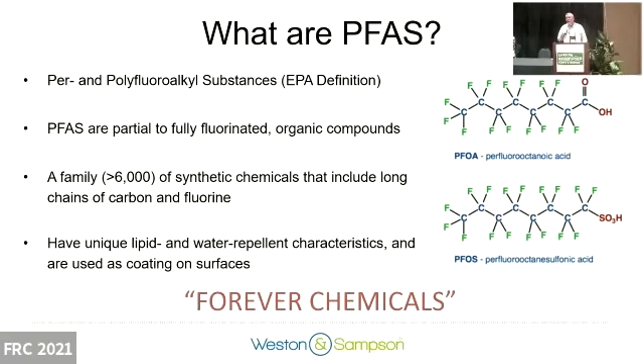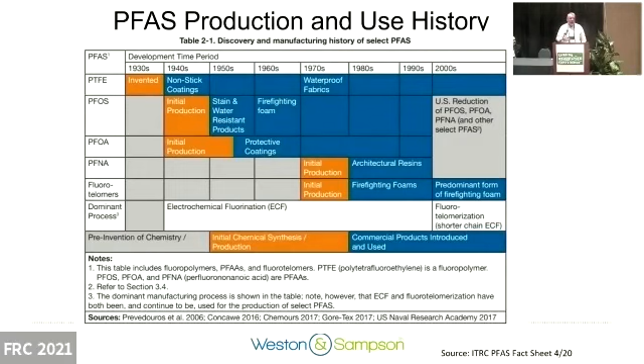A little bit about Weston and Sampson. Some folks may know us, our office in Florida is in Fort Myers. We're actually a 122-year-old infrastructure firm, environmental infrastructure. But why PFAS is important to us is we do a lot of work in the water supply side, wastewater industry in particular, and obviously environmental impacts. The nexus of those three disciplines is really where PFAS sits. We're headquartered in New England, but with offices up and down the East Coast. My background, I'm a hydrogeologist, studied geology at Imperial College London and did my master's at the Hydrogeologist program at the University of Nevada. So I come at this very much from a fate and transport perspective, but I've fortunately worked with a lot of colleagues that have other perspectives too, which has led to us forming an emerging contaminants work group at Weston and Sampson, where all the disciplines come together to evaluate this issue.

So I know most folks know this. What are PFAS? Just going to hit it very quick. As you know, fully or partially fluorinated organic compounds.

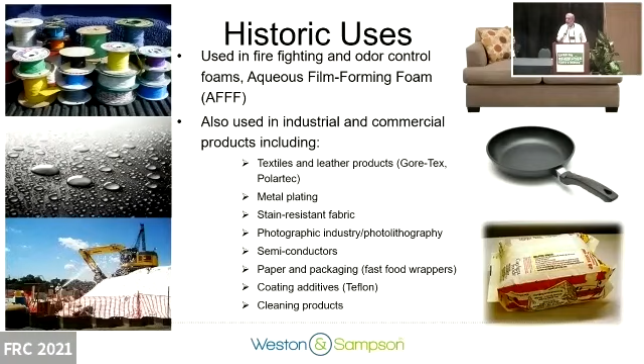PFAS is a family of compounds. We've seen anywhere from 3,000 to 10,000 compounds listed under the family of PFAS. The two ones that most people are most familiar with are PFOA and PFOS.

As most folks know, they're everywhere. What makes them useful is their unique lipid and water repellent characteristics. So they've been used as coatings and surfaces, and they've also been dubbed forever chemicals because they don't break down.

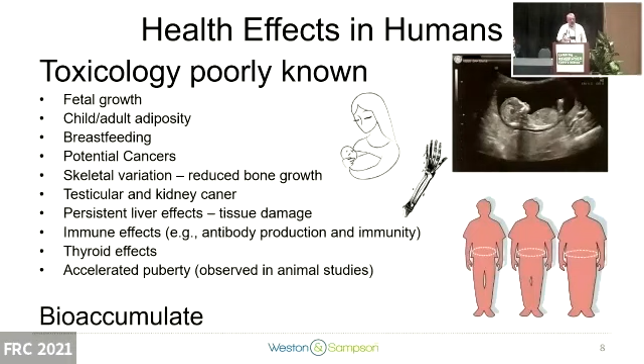Briefly on the history, as most folks know, Teflon was really developed in the 30s and 40s as non-stick coatings. It's been around for a long, long time.

But PFOS and PFOA started really in the 50s and 60s, with production ramping up through the 70s until really the 2000s, where production was ceased, replaced by replacement compounds that we'll talk about in a minute.

PFOS occurs in stain-resistant products and firefighting foam, and that's one of the big sources that folks know about. PFOA tends to be more in protective coatings.

So as I mentioned, historic uses: PFAS compounds are in everything from food packaging to stain-resistant carpets to simonizing your car to aqueous film-forming foam, the firefighting foams that we find. So that's why they're ubiquitous. That's why we're finding them everywhere.

When we talk about health effects in humans, toxicology is poorly known, really. There's a lot of studies that have happened in the last few years, but the data is inconsistent, I would say. But there is evidence clearly about fetal growth, potential cancers, persistent liver effects, child and adult adiposity.

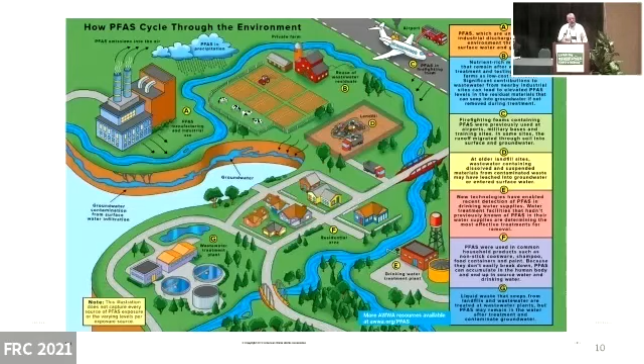We're going to talk about water supplies because the main source of PFAS exposure is through ingestion. Point sources, wastewater treatment facilities, biosolids is a big issue.

It's interesting, I think one of the takeaways today is you'll see how quickly regulations have been changing over the last few years. Just yesterday, I saw a letter from New England Water Environment Association to the Massachusetts DEP, particularly pleading the case. It was very strongly worded, actually, for wastewater treatment plants and the challenges they face right now.

Because they end up being a collection point for a lot of water from around a large sewer shed and become a point source discharge. So this is a real problem for them. Landfills, fire training academies, which we're going to hear about, which will be great, and various products.

This is an American Waterworks Association slide. It's very busy. I like it because it just captures kind of the PFAS cycle in the environment.

Multiple point sources ending up in soil and groundwater, be it from runoff, be it from land application of biosolids, be it from aerial discharge. Water treatment plants take the water out, it gets concentrated back at the wastewater treatment plants, back into the cycle.

And the cycle repeats. So this is why when you may have a point source of PFAS at one area, because of how it's collected and moves, it can end up getting spread around in different areas.

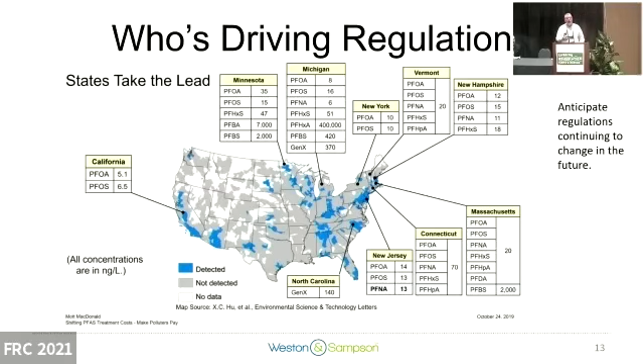Other states are taking the approach of, well, let's understand what our issue is. So in South Carolina, for example, they're looking at their water supplies first. They have a lot of surface water supplies, so they're looking at intakes, and they're coming at it from the approach of, well, we're going to hold to the EPA health advisory, but we're trying to get our arms around how big a problem we have. A number of states have taken that approach.

The key, of course, is once you've got information, managing that information and risk communication. In the plenary yesterday we were talking about that, and obviously we're in a post-Flint, Michigan world, so it's so important how, as agencies collect the data, they present it. I know we've got some folks from Florida DOH here, and I'm interested in hearing from them about how their program is going and how that information is stored and communicated.

So who's driving the regulations? As I mentioned, the states have been for the last 3, 4, 5, 6 years. In Minnesota, Michigan are out in front of this, California, as you might expect. In the Northeast, it was the state of Vermont that really stepped up.

Vermont and New Hampshire, those two states have a lot of private bedrock wells, so the whole state's considered a drinking water resource. So they came at it and looked at the 70 parts per trillion and said, no, that's not good enough. We want to evaluate our most sensitive population, i.e. babies, and they dropped their limit to 20.

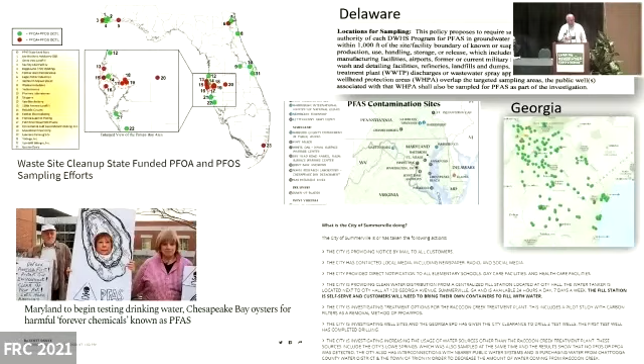New Hampshire, for example, required that every active landfill monitoring program and waste assessment program test for PFAS. That was a requirement, and they uploaded all that information to a database.

Other states are kind of doing something similar. Massachusetts is starting to require that. But the problem there is then you become, if you've got it in your own well, a PRP. So people are refusing to test. And this is getting very, very thorny right now because it can lead to enforcement, as we've talked about.

So, mentioned the states leading the charge. In some instances, like the picture here of a grassroots group in Maryland, some of these projects, some of the impetus, I should say, happened really from grassroots involvement.

My company's working on a different site in Portsmouth, New Hampshire, working for the city where they've got municipal wells. They were shut down because they're adjacent to Pease Air Force Base. PFAS was found in the water system. This was before New Hampshire DES had any regulations in place, but the public outrage and pressure resulted in an immediate shutdown of those wells.

And so really the assessment and evaluation of that system and the source area, of course that the Air Force was already looking at, went way out in front of where the regulations were at that time.

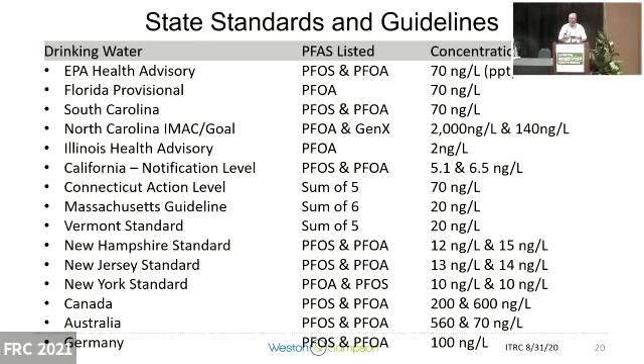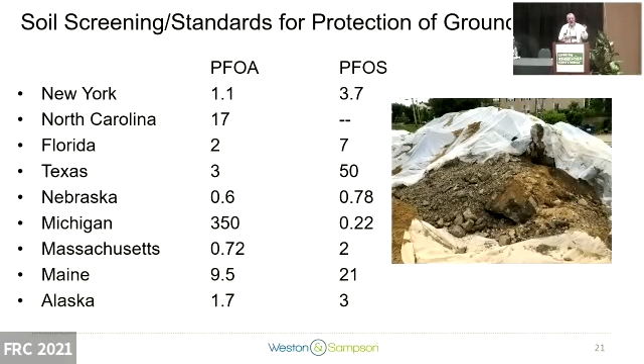I have a different example up in the Northeast where one of the agencies, the Department of Health, had collected data, stored that data, but hadn't communicated to the Department of Environmental Protection who was responsible then for responding to PFAS. And so it created a little bit of stress between those agencies. So I think the dynamic plan, again, I'd love to hear from the Florida folks here, is designed to iron out some of those challenges.

So this is a snapshot, and it's interesting just to see where we're at across the country. 70 nanograms per liter, parts per trillion, EPA health advisory. Many states are following that. But where are other states? I mentioned Vermont, 20 nanograms per liter for 5 compounds.

Massachusetts has gone for 6. New Hampshire has standards for PFOS and PFOA of 12 and 15. New York, 10 and 10. So the states are all over the place, and it sometimes feels like a race to the bottom. And as we all know as environmental professionals, the lower we go, the harder it is to test and have reliable tests.

Interestingly, Canada, Australia, and Germany have a completely different set of numbers that they're working from. Canada, 200 and 600, is that right? I don't know. It really shines a light on where the toxicological studies are at and the assumptions that went into those.

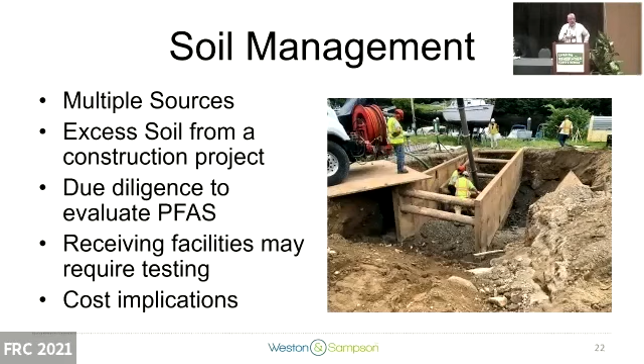Soil screening standards are coming in. Florida has some standards and will be enacting them. This really shines a light on one of the challenges we're facing right now, particularly in soil management. I was listening yesterday in the plenary, talking about management of contaminated soil. It's something I do a lot of in my day-to-day job, particularly working in the Northeast where there's a lot of old legacy sites and a lot of construction. It really shines a light on the need to do your due diligence.

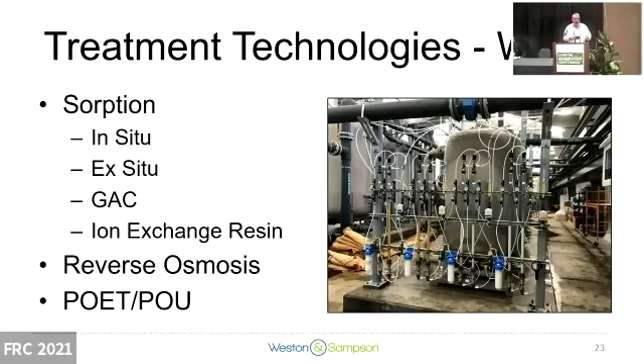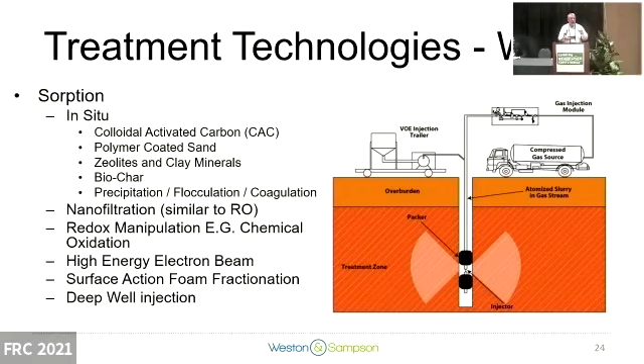What we're seeing now is receiving facilities either requiring testing of soil, and as most of you know, the soil methodologies for PFAS are kind of all over the place, but they're either requiring testing or requiring certification from the environmental professional that there's no PFAS there, which of course now has cost implications, schedule implications, etc.

We worked on a project in New Hampshire. We only had like a 50 to 80 cubic yard pile of soil, but we knew there was PFAS in it from the site history, and no one would take it. We actually had to go to Canada. So as you can imagine, there's paperwork, schedule implications, cost implications. Fortunately, we were able to move that soil just before lockdown and the Canadian border shutting. But Canada can't be the solution. So soil management is going to be a real big issue moving forward.

So we'll talk a little bit about water treatment. My company comes at it from the perspective of water supply, where we've been looking primarily at granular activated carbon, GAC units, but we've put in about seven or so emergency systems now for large scale municipal water supply wells. We've got GAC units, we've got resin units, we've done pilots where we've looked at combinations of both, and they work very well. Reverse osmosis works really well, and we've also worked on a lot of point of entry and point of use systems.

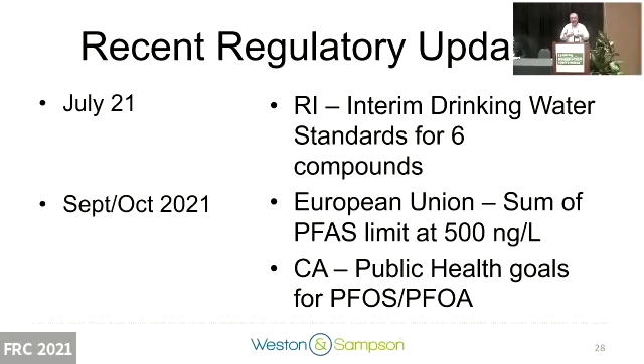I thought it was interesting—a lot of us have been working in the environmental field for a long time, and I can't remember any compound or family of compounds that got as much attention as PFAS so quickly. I just threw out a bunch of milestones that have happened really since the COVID outbreak. It seems like yesterday, but it also seems like a long time ago.

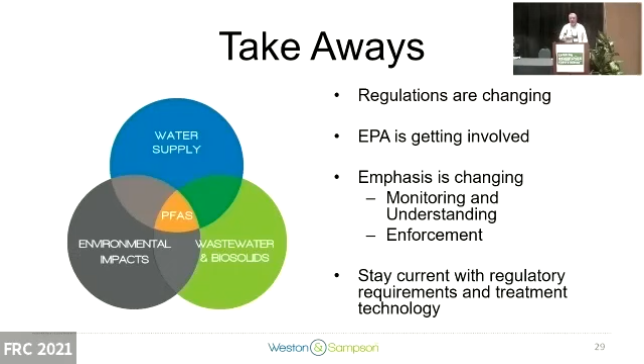But from March 2020 to now, what's been happening around the country? Vermont came out with their Sum of 5. New Jersey came out with their standards. Colorado came out with numeric values. New Hampshire formalized their standards. Michigan came out with drinking water standards. New York came out with drinking water standards. Massachusetts formalized theirs and came out with the Sum of 6. Illinois came out with the PFOA Health Advisory. Texas now has standards for 16 PFAS compounds, as does Hawaii, with their action levels. Illinois came out with new guidance for PFBS—not so many states have guidance yet for that compound, and EPA is looking at it. Rhode Island came out with standards for 6.

Interestingly, just last month the European Union came out with a PFAS limit of 500—much more lax than what we have here in the States, but interestingly it's a sum of PFAS, and I don't know how many compounds they count to get to that 500. And of course California came out with some recent goals. Then we have new information from the feds that they're starting to take this seriously and are going to evaluate the toxicology studies of PFOA and PFOS. All this has happened in 18 months, so it's amazing the pace of change. Takeaway: regulations are changing.

You know, what happens in other parts of the country we need to pay attention to, particularly if you play in the water supply world, where you may be finding concentrations in groundwater around 30 to 40, which we see in Massachusetts all the time, or low teens, because you might be below the limit today, but if the limit changes or the state decides to go to a sum, then suddenly these sites are going to require cleanup.

EPA is getting involved, as we mentioned, and the emphasis is changing. It's been monitoring and understanding, but it's leading to enforcement. I'm certainly seeing that in the state of Massachusetts and starting to see it in some of the other states, in New Hampshire particularly.

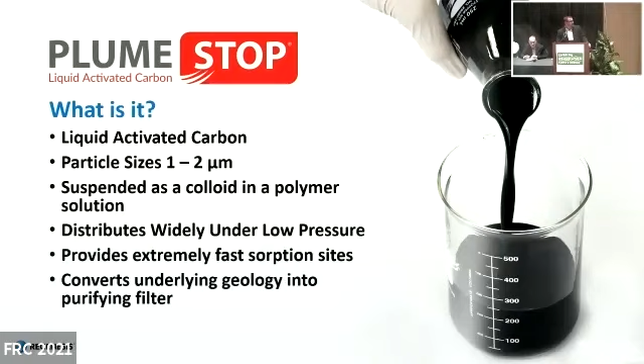So really, the question is, forever chemicals -- do we have a forever solution? All right, so keep that in mind. Let's see what we got.

So I would be remiss if I did not actually introduce the real brains behind the operation. I'm just the mouthpiece for all these folks that are part of our PFAS team. Both doctors Paul Erickson and Kristen Thoreson out in California have been essential and vital to the development of our technologies, both Plume Stop that we'll talk about today, as well as some of our flux mapping tools.

Jeremy Birnstingl, hailing from Bath, England, is the man behind the curtain for Plume Force, which is a software that I'm going to talk about a little bit today that we use to model Plume Stop longevity.

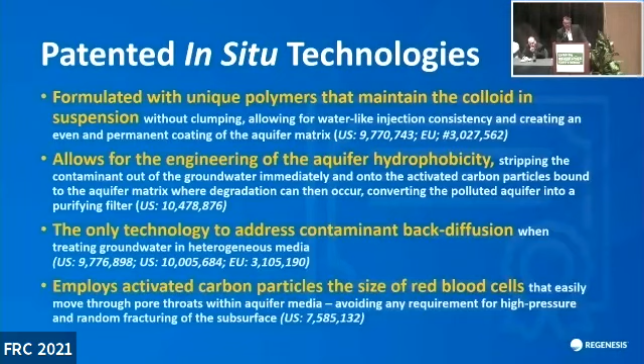And Dr. Liu has been supporting this entire PFAS team. I know a lot of you have heard me talk about PlumeStop or others in the past, but typically we're co-applying it with other reagents to degrade and have a destructive technology for the contaminants. In the case of PFAS, that's a little bit different, so you may not know what we've been doing with it in the PFAS world. I want to dig into that a little bit today.

In case you aren't familiar with PlumeStop, there are two key things. One is the size of the carbon - this is 1 to 2 micron scale carbon, basically the size of a red blood cell, relative to GAC, granular activated carbon, which is more on the scale of 500 to 1,000 microns. The second thing is that this has an organic polymer that allows for a unique dispersion within the subsurface. So we can do high volume, low pressure, wide area distribution with this technology, which is vital for forming essentially a carbon filter, a purifying filter, in the subsurface.

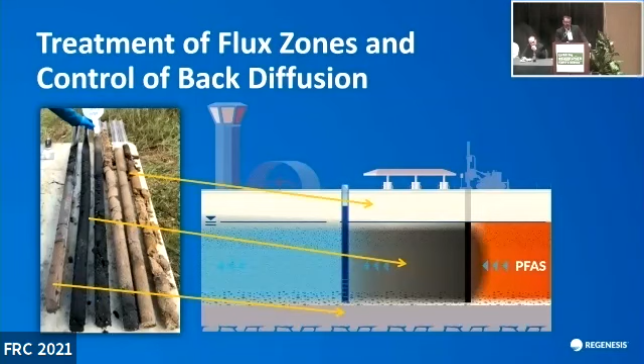I think one of the ways to really understand the technology is to get under the hood a little bit and take a look at the patents associated with it. I know that sounds boring sometimes, but it was kind of enlightening to me when I started thinking about what is it we said we can do with this stuff.

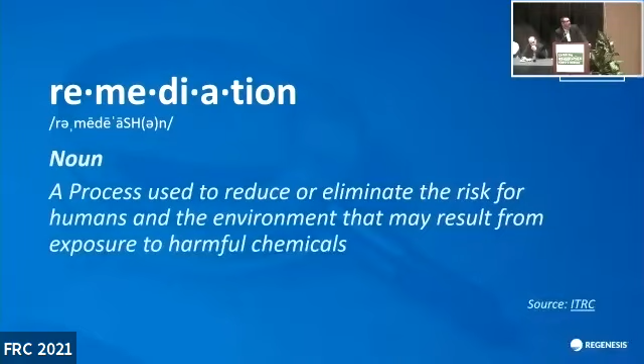One, like I said, there's a unique polymer, a dispersion chemistry that's vital for distribution. The second is the ability to engineer the aquifer hydrophobicity - another way of saying that is engineering the retardation in the subsurface. That's a unique quality for an in situ reagent that I'm going to dig into a little bit more with the modeling and what we do with that fact. So keep that in mind - aquifer hydrophobicity. Say that really fast several times.

And we're also able to deal with back diffusion because of the longevity and permanency of this reagent in the subsurface - I'll visually share that with you in a bit. And of course, again, this small size of the carbon is vital to getting it to where it needs to be.

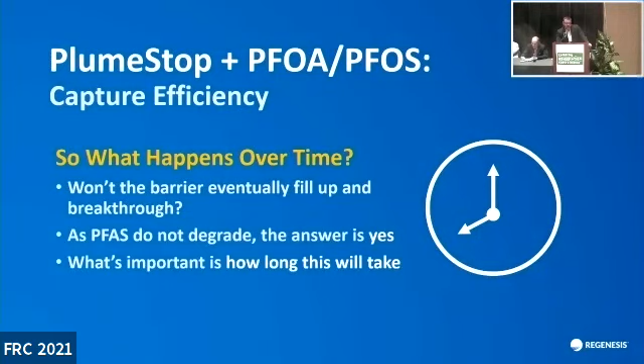Generally in most of our designs, what we're really trying to do is target what we call the flux transport zone. This is the area of the plume whose architecture and behavior is shaped by where the contaminant mass is moving through the aquifer matrix, through these very high permeability zones in most cases. Once we have it in place there, we can deal with back diffusion from lower permeability units. The carbon remains in place and keeps working for us after there's been a change in that aquifer concentration gradient. Even if we have stuff infiltrating from the vadose zone above, for example, we can still manage that in this high flux transport zone. So that's kind of our target.

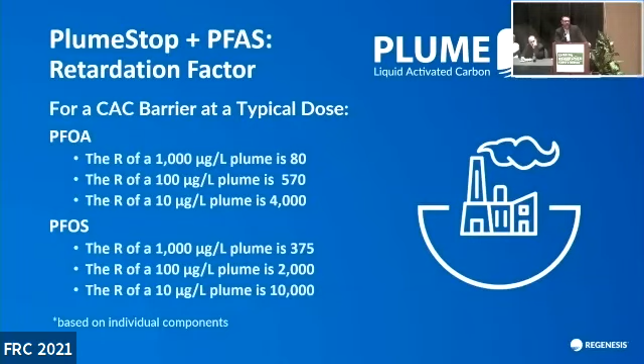It's kind of funny being at the Florida Remediation Conference, and I'm going to tell you what remediation means. According to ITRC, let's back up and think about what remediation is: a process used to reduce or eliminate the risk for humans and the environment that may result from exposure to harmful chemicals - eliminate the risk to exposure. With that being the case, we know that in our world, risk equals the product of hazard times exposure. So if we can bind up the PFAS in situ - again, this is not degradation or destruction, but a binding up, an adsorption of this - then we can eliminate any potential down gradient exposure. By eliminating exposure, we eliminate risk, very simply. We do this all the time, really, with risk-based corrective action, no further actions, where we leave contaminant mass in place. So this isn't really a new concept, but this is what's behind it.

That being said, I'm sure some folks are thinking, well, it's a carbon filter in the subsurface, it's going to fill up, there's going to be breakthrough at some point. And that is very true, because we're not destroying or degrading mass in this case. However, probably the more important questions are: how long is that going to take? Can we model that?

And what could we do about it if we do have breakthrough? So let's take a look at some of those questions.

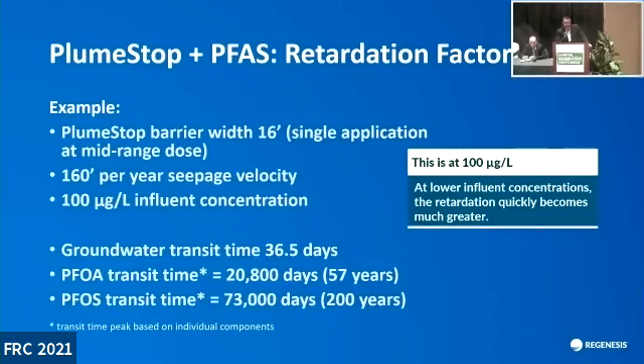First of all, I mentioned earlier about modeling the aquifer hydrophobicity, that we have the ability to engineer the retardation factor. As a reminder, a retardation factor value of 1 means the contaminant molecule and a water molecule are basically moving at the same velocity in the groundwater. As we increase the retardation factor, think of it as slowing down that contaminant molecule through the aquifer.

You can see for different plume concentrations, let's go down to the 10 ppb. Keep in mind 10 micrograms per liter is 10,000 parts per trillion, which falls in the realm of a lot of our PFAS plumes. For PFOA and PFOS, we can increase the retardation factor to values of 4,000 to 10,000. That's orders of magnitude difference in the movement of that contaminant molecule. That's very significant.

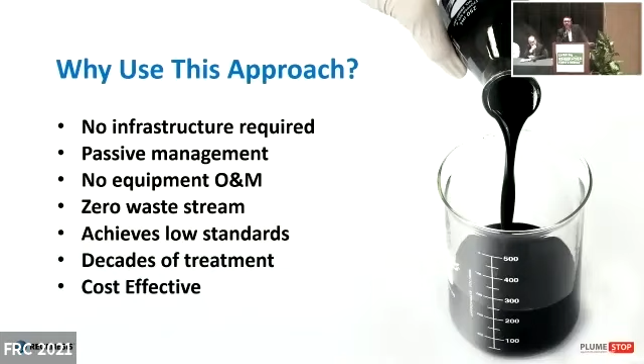So what can we do with that information? Here's a practical example. Think of a 16-foot wide plume stop barrier in the subsurface. We've got about 160 feet per year as a seepage velocity, a decent clip. And we're looking at a plume that's 100 ppb, about 100,000 parts per trillion. So for the groundwater transit time to move through that zone, it'd be about a month, about 36 days.

If we look at the equivalent for PFOA, we're talking about 60 years, six decades for that contaminant molecule to work its way through that same zone. If we look at PFOS, which is even more adsorbed, we're talking about two centuries, 200 years. You can see the difference in the ability to engineer has some implications.

So why take this approach? We call this passive plume management. A lot of folks think of it as putting in a permeable reactive barrier of sorts, and that's true too.

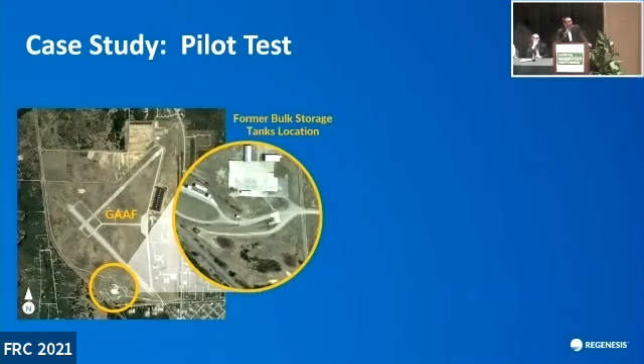So you don't have any infrastructure, which means no O&M. That also means, as George was saying earlier, we're not generating any media above ground that might have to be dealt with as a hazardous substance. That's coming down the pipe, and we need to be preemptively thinking about that. So no waste stream is being generated through this.

And we know carbon in all its forms, colloidal, micron scale, GAC, all of it can manage to treat down to the part per trillion range. A lot of things can't achieve that. And I'm going to show you in the modeling that we can achieve decades of treatment by putting a single application in the ground. So that obviously sounds pretty cost effective.

So here's a story from Michigan. I hail from Michigan, don't hold that against me. Former Michigander turned Floridian. But this is an example.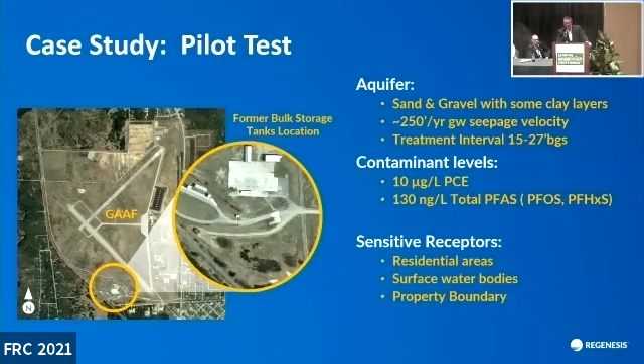It's not the longest running site that we have. This is about 3 years now going on below cleanup levels. We have others that are a little bit longer. We've all been in this game not too long as it is. So 3 years isn't too bad in this story.

This is the Grayling Army Airfield near where I used to live up in northern Michigan. It's actually got some interesting history. It's the largest National Guard training facility in the country, which I didn't know when I lived up there. It's over a century old, around since the early 1900s, almost 150,000 acres. Our focus area is only about 1,000 acres of that at the Grayling Army Airfield.

So there's been a long history here: diesel releases, later chlorinated solvents were identified, and now PFAS, as we're going to find at a lot of sites. And it has kind of a traditional remediation history, pump and treat, SVE, air sparge.

So kind of honing in on the subject area there, you can see the airfield, and then we're down towards what was the former bulk storage tanks location.

If we look at the geology, as expected, a sand and gravel, some clay lenses, moving along pretty good, 250 feet or so per year for the seepage velocity. We're going to target an interval between 15 and 27 feet. We're going to actually divide that up into 2 intervals that you'll see later with our monitoring wells, nested monitoring wells.

Pretty low levels of chlorinated solvents, but this is a commingled plume. Again, a very common scenario. Most cases we're seeing that these are commingled hydrocarbon or chlorinated solvent plumes with PFAS. The total PFAS is around 130 ppt, with PFOS being kind of the driver.

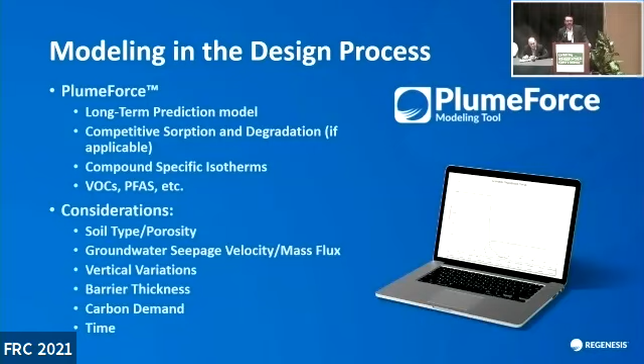And there's a bunch of sensitive receptors down gradient, just down gradient is a residential area, the Au Sable River, where I used to fish and camp. So it's starting to hit home for all of us as we're finding out how ubiquitous this stuff is. The very place I used to hang out and fish with my family is near the subject site that we're talking about today.

So I mentioned earlier modeling software. Plume Force is something that was developed internally for us. This is essentially a long-term predictive model, so a fate and transport model. It takes a lot of stuff into consideration, again, when you go under the hood.

So we're looking at competitive adsorption. When it's applicable, we're looking at degradation and destruction. So if we do have a commingled plume, we can degrade and destroy those contaminants via other biotic or abiotic means. So that's taken into consideration as well.

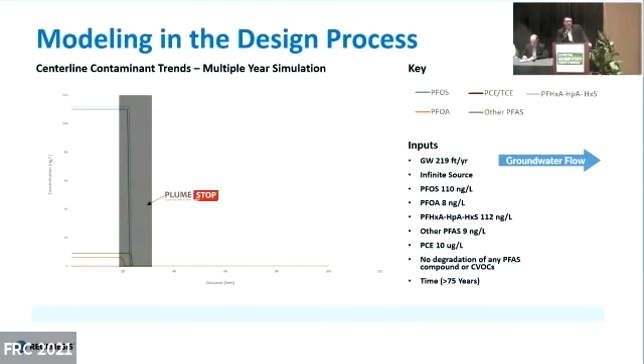And we're also looking at compound-specific isotherms. So how well do certain compounds adsorb to the carbon? And that varies for each compound. It actually varies with the type of carbon. Granular activated carbon has a different isotherm than colloidal activated carbon, which you may not know, but the smaller particle size allows for more efficiency with the colloidal carbon.

And then we can do this for all the different classes of compounds, whether they're chlorinated, PFAS, hydrocarbons, et cetera. So then there's a bunch of parameters that we can dump into this. Some of them are fixed based on the geology, whether that's the porosity, for example, based on the soil type, and we can look at hydraulic conductivities.

But then we can start manipulating some of these things. Well, how thick of a barrier? How much of a dose? Things of that nature. And doing that, we can either predict the longevity, or we can use a certain dose to see what kind of longevity that we want to target. So we can start messing around with some of these parameters.

So here's kind of a typical example of an output from that software. You can see the different contaminant types up there in the key. I'll point out for the inputs on this, we're assuming an infinite source, and we're also assuming no degradation, which neither is really the case. So it's a very conservative estimate.

So looking at groundwater flowing from left to right on here, you can see putting in the 10-foot barrier. We can look at each one of these compounds and predict how long they're going to stay within that barrier. Again, that adsorption isn't a permanent process, but we're changing the retardation factor. We're altering the FOC.

So we can look at how long it's going to take for breakthrough to occur here. So we look at both the chlorinateds, we're looking at the different PFAS compounds. In this model, we would assume that it would take over 75 years for that to occur. So again, that's a conservative estimate. These are fairly low level concentrations, but that's a really long time.

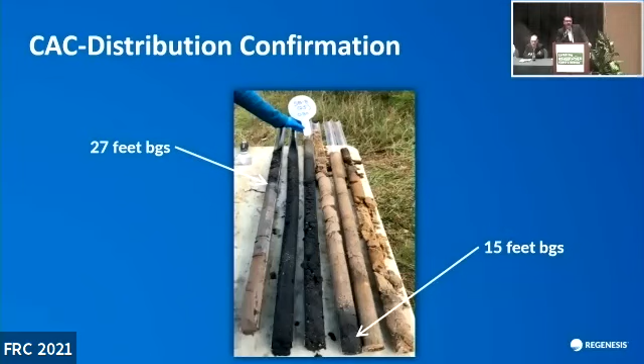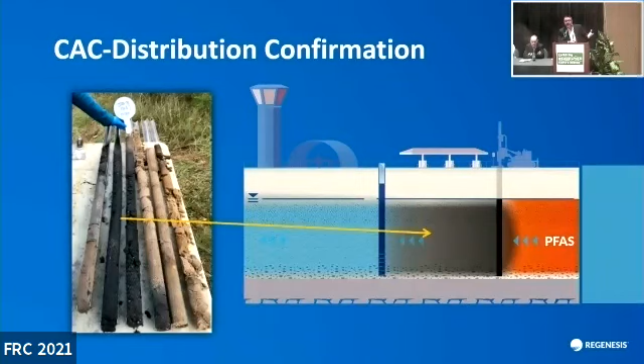Another thing that's really cool about using carbon in the subsurface is we can use it as a tracer. We can look at placement validation, as we like to call it. We can do these searcher cores and go out and take cores as we start remediation in the field, and we can make adjustments. So we might assume we can go a little further than the ROI and step out at the edge of the barrier to see if we get influence. If we don't, we move back into our ROI and make those adjustments real time in something I'd call dynamic remediation, making changes in the field to optimize based on the baseline being our design.

So you can see here, we started out a little bit further than we anticipated from the ROI. We didn't see it, so we moved back in and started getting these searcher cores showing evidence of the carbon distribution. We did that across the barrier in different locations.

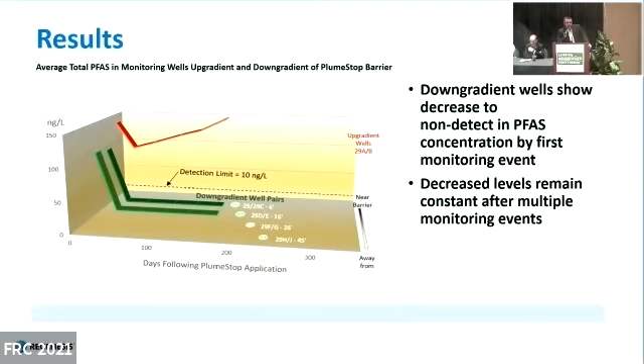Here's a great visual where it becomes very evident. We've got carbon distribution. If you look to the right, that's the top of the surface, going down to that lower permeability clay at 30 feet. Then about at the beginning of the water table at 15 feet BGS, down to 27 feet, we got good solid distribution of that reagent across the entire target zone.

Remember I said earlier that target zone represents what we're calling the flux transport zone. That's really where we want to get the bulk of the reagent mass, and that later will also help deal with any back diffusion from that low permeability clay and anything that might be coming in from above.

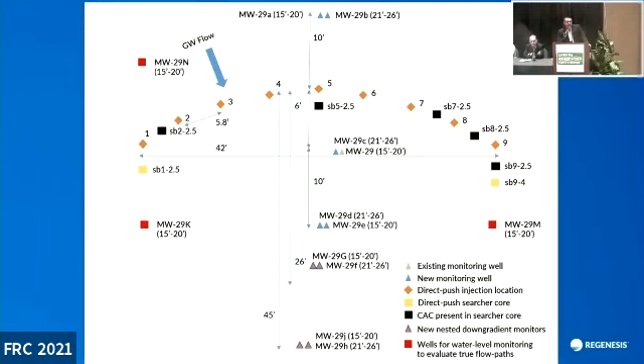Sometimes it's not that obvious, depending on the soil type and color and things of that nature, and the concentrations. So there are other things we can do. Sometimes we'll do what we call shaker vials for placement validation — essentially adding a little water to some of the soil samples, and we can start to see that plume stop come out. And of course, at the monitoring well, we want to see influence — it's very evident. We want to make sure we're achieving that ROI, and we can use colorimetric test kits to confirm the concentrations against the design as well.

And that will eventually deposit and become a permanent part of the aquifer matrix. It binds to the soils, and that is permanent. So you won't see it lasting in the wells forever — usually within a quarter it'll be gone. It's a great indicator up front.

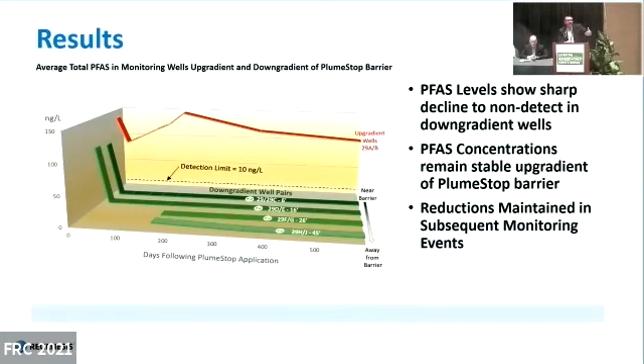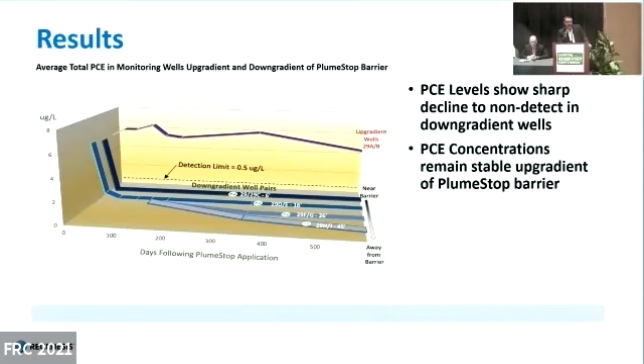So here's a couple of charts I'm going to walk you through. This represents total PFAS. The red line above is the influent concentration — it's steady and trending downward a little bit over the course of this period. The two lines below represent those sequential nested well pairs, the first and second, and you can see an immediate drop to non-detect of the PFAS compound concentrations right off the bat. Those concentrations are sustained through this particular duration of about 500 days.

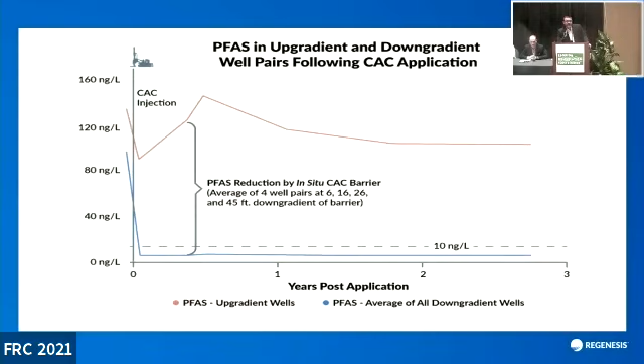So that's the PFAS story. And if we look at the chlorinated solvents, the PCE in this case, same story — we got a steady influent concentration, that top line.

We see an initial drop right off the bat from those closest wells, and then a little bit more pronounced lag going from the down gradient wells that eventually tail off to non-detect. So all of this has been sustained now for about 3 years.

To put it in a simpler perspective, you can see the average coming in for the PFAS in the red line, and down below you see after injection the average across all of those wells below 10 ppt, the detection level.

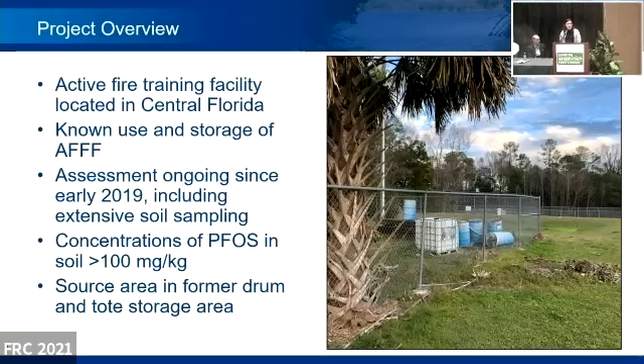Oh, look at that. Hey, everybody. As Joe mentioned previously, today I'm going to be talking about an ISR that we recently completed at a site here in Florida. We believe that this is one of the first interim source removals for PFAS at a fire training facility in the state, and we encountered some very unique challenges that I'm going to share with you today. I'd like to thank the FDEP for the opportunity to work on this project with them and to be able to present it to you all today.

During this presentation, I'm going to provide an overview of our project and a little site history. I'm going to review the objectives of our ISR, discuss the project's timeline and some considerations we made during the planning process, share some lessons learned during the project, and highlight some key takeaways.

Our site is an active fire training facility located in Central Florida. The facility has stored and used AFFF historically for training exercises, and they've used a variety of different AFFF products, including protein-based foams. Geosyntec has conducted assessment activities since the beginning of 2019, which has included both soil and groundwater assessment, but I'm going to focus on the soil today because we're talking about the interim source removal.

That's included the collection of over 800 soil samples at 150 boring locations to evaluate the extent and magnitude of PFAS across the site. One source area we identified is their former drum and tote storage area, which you can see pictured on this screen. We have identified concentrations in soil of PFAS, PFOS specifically, at concentrations greater than 100 milligrams per kilogram, and some samples greater than 200 milligrams per kilogram.

We have had a few exceedances of PFOA, but they've mostly been leachability-based criteria exceedances and not direct exposure exceedances. So our driver at the site really is PFOS specifically, and that's not that surprising considering that the source is AFFF related.

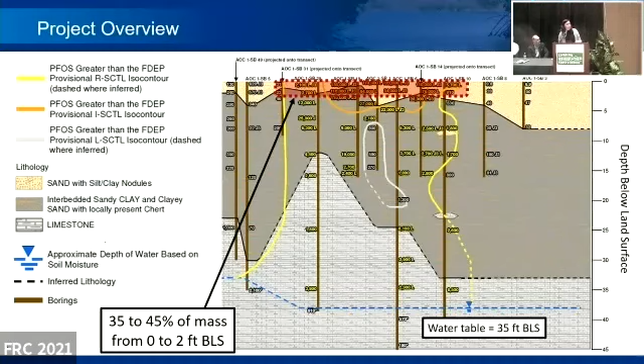As mentioned on the previous slide, our site-wide soil assessment has included the collection of 800 samples, but this specific area where they used to store the drums and totes, we've collected close to 450 samples at 64 boring locations, which is quite extensive given the size of the site, but that was really to refine our understanding with the end goal being remediation. So we really wanted to understand exactly how much was there and at what extent.

This slide includes a cross-section of this former drum and tote area. If you can see the colors, the yellow contour is the concentrations in soil that are above the residential direct exposure SCTL for PFOS. The orange contour is the concentrations in soil that are greater than the industrial SCTL. And the gray contour is the concentrations that are greater than the provisional leachability-based criteria.

As you can see, the geology at this site consists of surficial sands interbedded with clayey sand and sandy clay, followed by limestone. The limestone varies greatly with topography across the site, and you encounter it at all sorts of different depths. You never know what you're going to get when you're hand augering. The depth to water ranges between 35 and 45 feet.

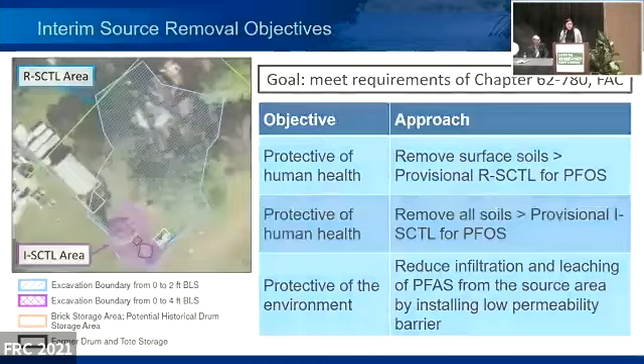As I mentioned previously, our primary contaminant of concern at the site is PFOS. During our assessment activities in and around the former drum and tote area, we identified concentrations greater than the provisional residential SCTL from land surface all the way to the water table, which, as I mentioned, is 35 feet at a minimum.

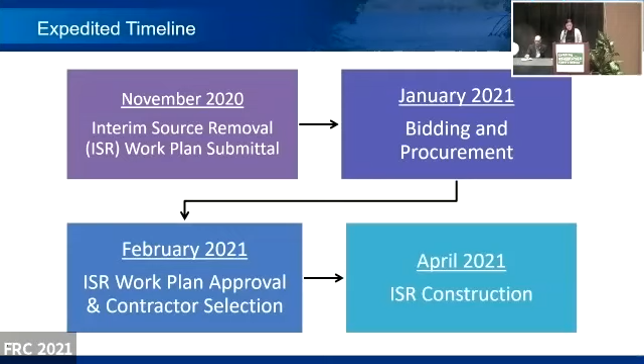Our concentrations of PFOS above the industrial SCTL extended from land surface to 4 feet, but approximately 35 to 45% of the total mass from land surface to the water table was within the top 2 feet alone, which is noted in the red square on the screen.

The image on the left of this slide illustrates the horizontal extent of our excavation areas. The blue shading indicates the excavation proposed based on residential SCTL exceedances, and the purple represents our proposed excavation based on industrial SCTL exceedances. It might be hard to see, but if you notice the little black squiggly lines, that's actually the footprint of where the drums and totes were formerly stored in this area.

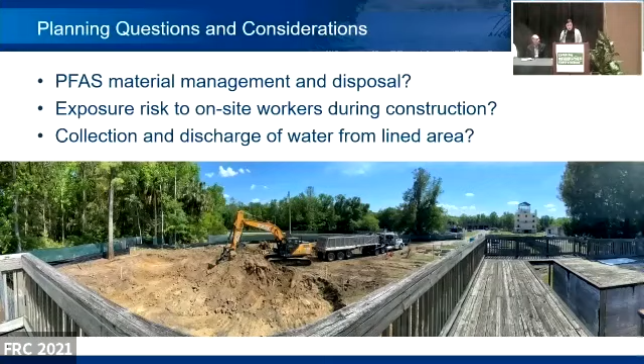The goal of our ISR was to meet the requirements outlined in 62-780 for an interim source removal and for engineering controls, and we wanted to be protective of human health and the environment. So our approach was to eliminate the direct exposure concerns by removing soil within the top 2 feet that was greater than the residential SCTL, and then removing all soils that were greater than the industrial SCTL for PFAS, which, as I mentioned, happened to be from 0 to 4 feet.

To help reduce infiltration and leaching from impacted soils left in place, we installed a low permeability barrier at the bottom of our excavation prior to backfilling.

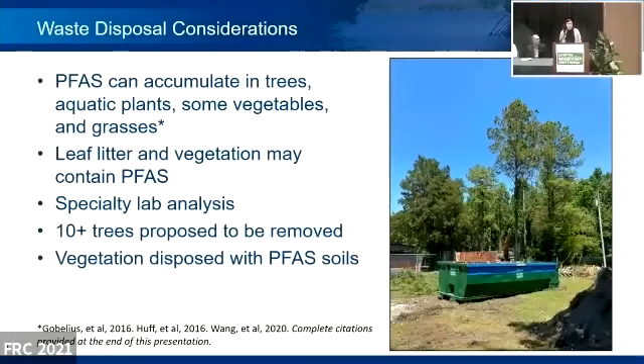The timeline for this project was pretty quick, and that was driven by the testing schedule at the facility. We submitted our ISR work plan in November of last year, and we began construction in April of this year. This brought about some planning challenges, but we were able to successfully implement our ISR in time.

As many of you probably can assume, there are many logistical challenges for planning a PFAS source removal, not just the expedited timeline for this project in particular, but just the nature of the contaminant itself. Some of these challenges include how the excavated materials should be handled and disposed. At our site in particular, we were managing soil, green waste, including vegetation and trees, and concrete. And what disposal facilities will accept your PFAS soils when you have concentrations that are in the hundreds of milligrams per kilogram?

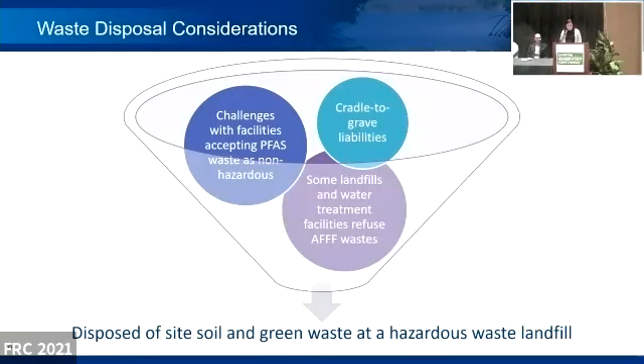When you're excavating, is there a risk of exposure to the on-site workers during construction? And when you install the liner to help reduce infiltration, how will the water be collected and discharged? The remainder of my presentation, I'm going to review some of these challenges, starting with the disposal consideration.

Literature suggests that PFAS can accumulate in trees, some aquatic plants, vegetables and grasses. So there's the potential that the leaf litter and vegetation at our site may have been impacted with PFAS as well. The sampling procedures and lab analysis can be costly because this is pretty fancy sampling.

Within our work area in particular, we were proposing to remove over 10 trees to achieve the horizontal extents, which would have required us to collect quite a few samples to evaluate whether or not the trees had PFAS in the first place. So given our expedited timeline, and to be conservative, we opted to just dispose of the trees and all the vegetation along with our PFAS impacted soils.

Some other challenges with disposing of PFAS waste, specifically waste that has AFFF, is that not all facilities will let you dispose of it as non-hazardous, and some facilities just won't accept it at all. Additionally, if it's disposed of as non-hazardous, that means there are potential cradle to grave liabilities for our clients. To be most conservative and help reduce potential future liability, all of our soil and green waste was disposed of at a hazardous waste landfill.

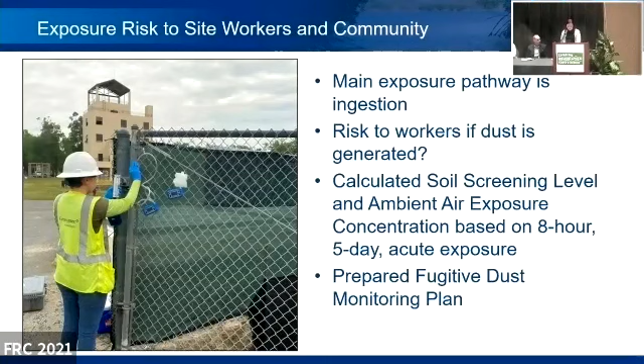The facility we selected had a closed loop leachate collection system. I should note that not all disposal facilities have a closed loop collection system, and some send their leachate to a treatment facility or dispose of it with other methods. This is something you should consider when selecting a disposal facility for your projects.

The next planning consideration we worked through was potential exposure to on-site workers and the surrounding community during construction. The main exposure pathway for PFAS is ingestion, and these compounds are not readily volatile, but there's the potential that PFAS sorbed to your soils may be ingested by on-site workers if dust is generated during construction.

As part of our ISR work plan, we developed a soil screening level and an ambient air exposure concentration based on acute exposure scenarios. The soil screening level represented a health-based screening criterion for soil, predicted based on worker inhalation exposure during construction with the potential that dust would be generated.

In theory, if you have soil concentrations substantially below this value, then you're unlikely to require ambient air monitoring. Our highest concentrations in soil at the site were well below our calculated value, but to be conservative and to confirm this risk, we opted to implement an air monitoring plan during construction.

The ambient air exposure concentration was based on our highest soil concentrations at the site, and we correlated it to a total dust concentration, which was used by our field staff. We developed real-time alert and action levels so our field staff could measure real-time time-weighted averages in the field to evaluate potential exposure.

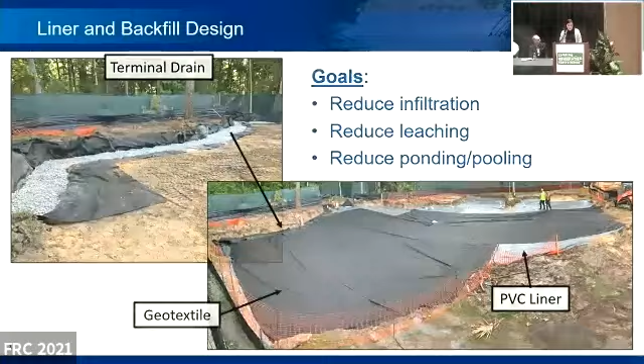Our upwind and downwind stations were placed on the fence line of the work area, and we determined their placement each day based on wind direction. If the wind direction changed, we'd move our air monitors accordingly.

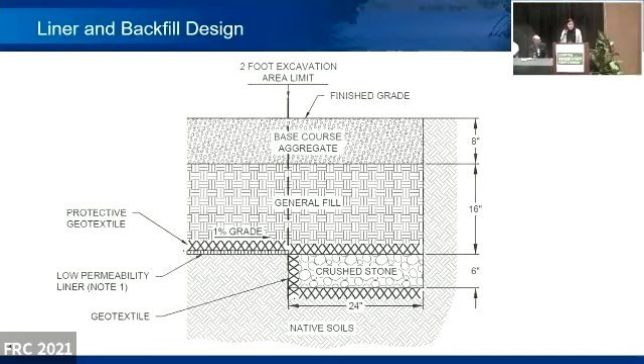We also collected lab samples every day for analysis of PFAS and total dust, collected at our downwind monitoring location. The photo shown on the left of this slide shows the sampling media provided by the lab, which consists of a low volume PUF tube.

The results from our real-time dust monitoring at all three stations were below our established alert levels, indicating that we did not generate dust that posed a risk to our workers on site. Our laboratory samples did not have detections of PFAS or total dust, indicating that our construction activities did not pose a risk to the surrounding community or to the facility personnel working and training at the site.

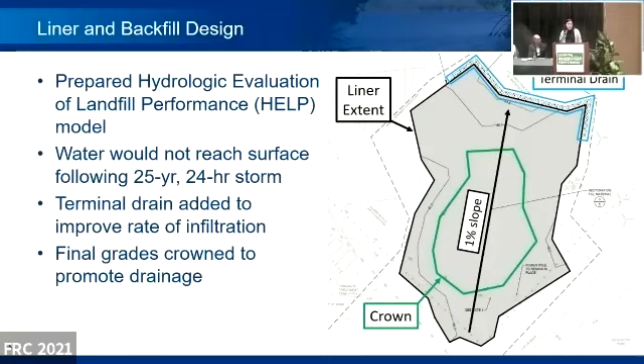As mentioned previously, to be protective of the environment, given that we were leaving residential SCTL exceedances all the way to the water table in place, we installed a low permeability liner at the bottom of the excavation, pictured here. The goals of the liner were to reduce infiltration through the impacted soils below, to reduce leaching to groundwater, and to reduce ponding and pooling within our completed excavation.

We didn't want to line an area that was going to fill up like a bathtub over time. So our solution was to propose sloping the bottom of the excavation towards a gravel terminal drain located on the northern end, shown in the picture on the top left.

This slide illustrates our backfill and liner design. As you can see, we proposed installing a low permeability PVC liner at the bottom of the excavation, followed by a geotextile intended to protect the liner during backfilling, so it wouldn't tear while we were backfilling. The bottom of the excavation was graded at a 1% slope towards our gravel terminal drain prior to placing the liner down.

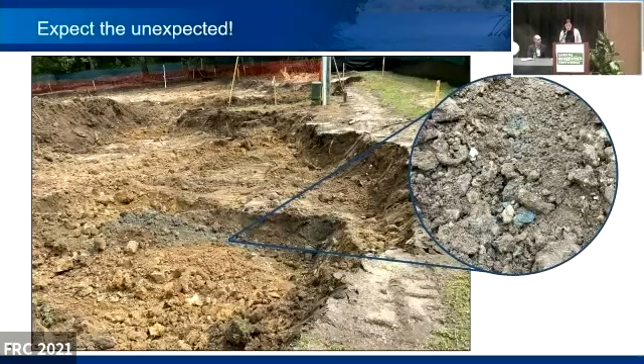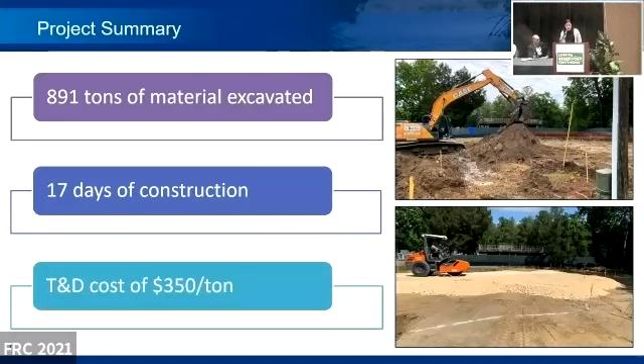Last but certainly not least, you should always expect the unexpected during construction. I don't know how well you can see the colors on the screen, but focus on the blue colored soils shown in this zoomed in picture. These are not native to the site, and we hadn't seen soils this color encountered during all of our site assessment activities, even though we collected quite a few samples.

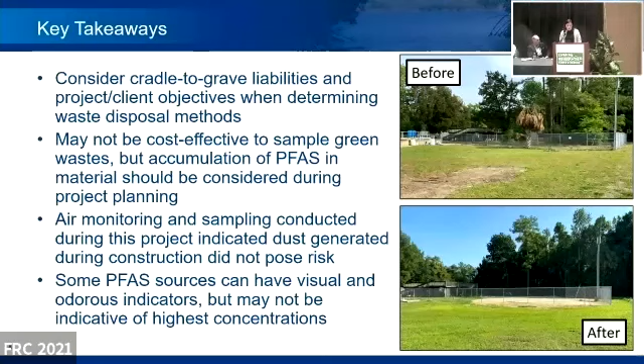But we uncovered this soil when we were excavating adjacent to our industrial SCTL exceedance area, and it happens to be co-located right underneath where the protein-based foam was stored previously. So we think the staining is related to that foam. The soil also had a really strong, pungent odor, which we also think is related to the degradation of that protein-based foam over time.

We continued excavating these soils with the blue coloring and used the odor as an indicator as well. We ended up excavating an additional 10 by 12 foot footprint from 2 to 4 feet deep, and collected a few sidewall samples of this blue colored soil. Interestingly, it didn't have our highest concentrations that we've seen at the site previously.

During the entire project, we excavated a total of 891 tons of PFAS impacted material. We had a couple of unexpected trucking delays once we started construction, which added some time, but the total amount of time was about 17 days. Our transportation and disposal costs were about $350 a ton to transport and dispose of it at a hazardous waste landfill.

To summarize, planning for and executing an ISR for PFAS has some challenges that are important to consider. It's important to understand the cradle to grave liabilities and specific client and project objectives when evaluating your waste disposal options. It also might not always be cost effective to sample your green waste, but keep in mind that because PFAS can accumulate in plant material, you should consider that when evaluating your waste disposal as well. The air monitoring we conducted during this project indicated that the dust generated during construction did not pose a risk, but this is something to keep in mind when planning for your other projects too.